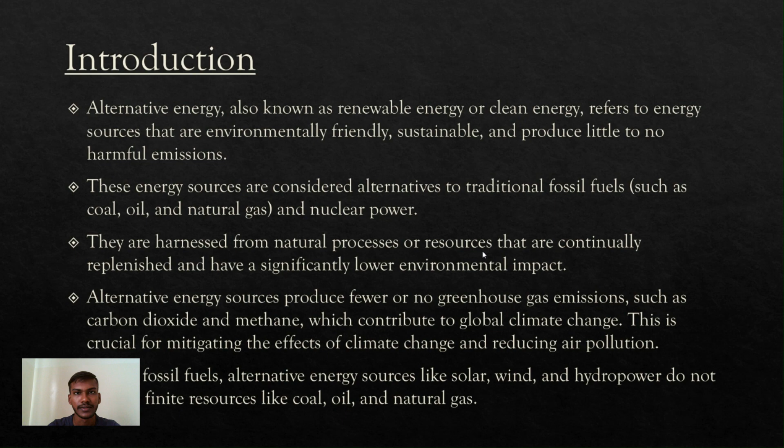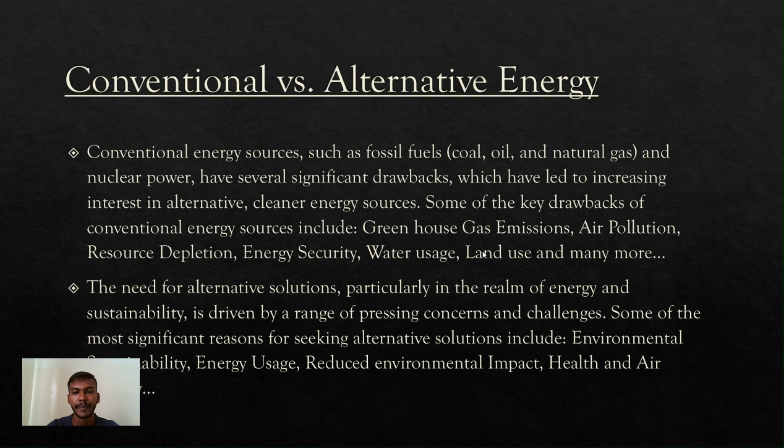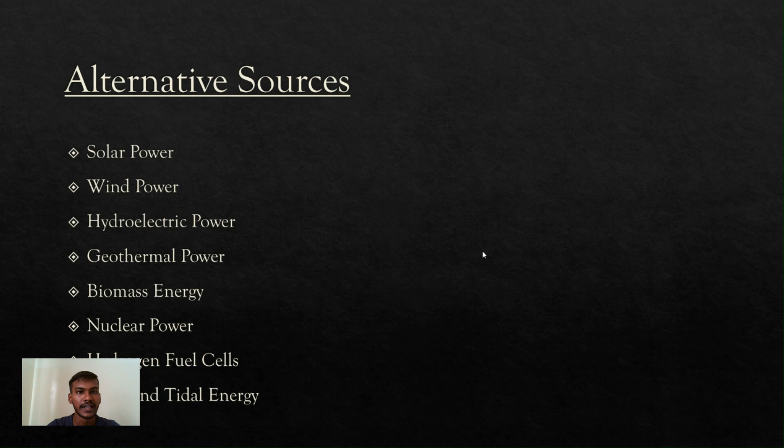We will be discussing the following alternative sources: solar power, wind power, hydroelectric power, geothermal power, biomass energy, nuclear power, hydrogen fuel cells, and wave and tidal energy. Now let's see them one by one.

Solar energy or power. Solar energy is a renewable and sustainable energy source that is derived from the radiant light and heat emitted by the sun. This energy can be harnessed and converted into electricity or used for various heating and cooling applications.

Solar energy can be harnessed through two main technologies. The first is solar photovoltaic systems. These systems use solar panels to convert sunlight directly into electricity. Solar panels are made of semiconductor materials, typically silicon, which generate an electric current when exposed to sunlight. This electricity can be used on site or fed into the grid.

Solar thermal systems capture the sun's heat to produce hot water or generate steam that can drive turbines for electricity generation. These systems are often used for water heating and industrial applications.

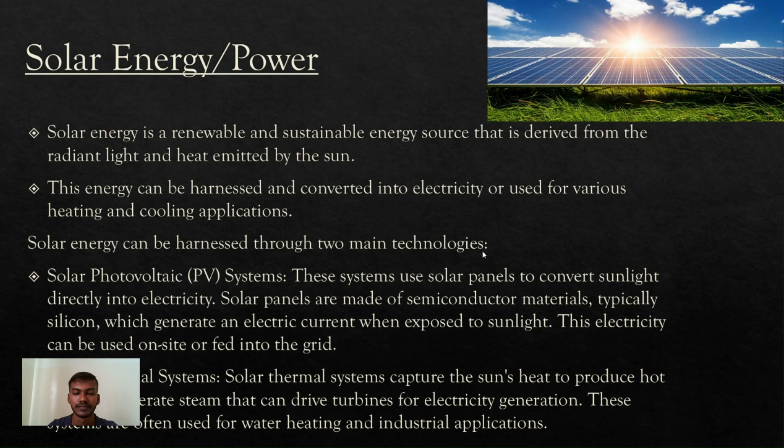The second source is wind energy or wind power. Wind energy is a renewable and sustainable energy source that is harnessed from the kinetic energy of moving air, primarily through the use of wind turbines. Wind turbines are designed to capture this energy and convert it into electricity. Wind energy has become a prominent part of global efforts to transition to cleaner and more sustainable energy sources.

Wind energy can be harnessed through two main types of wind turbines: horizontal axis wind turbines and vertical axis wind turbines. Horizontal axis wind turbines are the most common type and consist of a tower with a horizontal rotor shaft and blades.

Vertical axis wind turbines have a shaft and blades that spin around it. They are less common but have some advantages such as lower wind height requirements and easier maintenance.

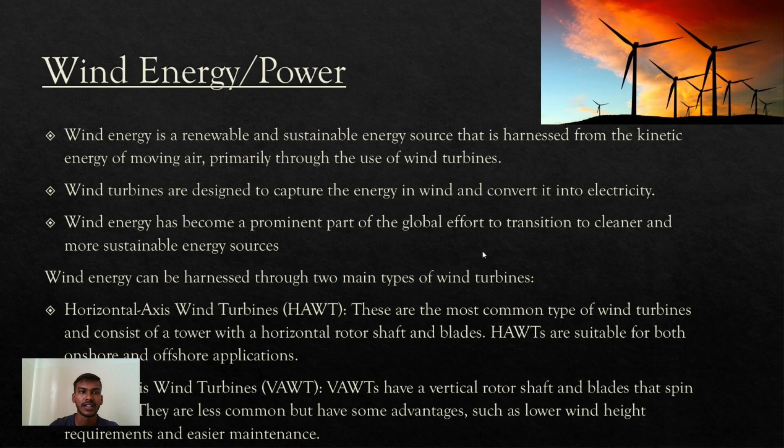The third source is hydroelectric power. Hydroelectric power is a renewable and sustainable energy source that is generated by harnessing the kinetic energy of flowing or falling water. This energy can be converted into electricity through the use of hydroelectric power plants. Hydroelectric energy is one of the oldest and most widely used forms of renewable energy.

There are several types of hydroelectric power plants, including conventional hydropower and run of the river hydropower. Conventional hydropower power plants use dams to create reservoirs of water, which is then released through turbines to generate electricity. This is the most common form of hydroelectric power generation.

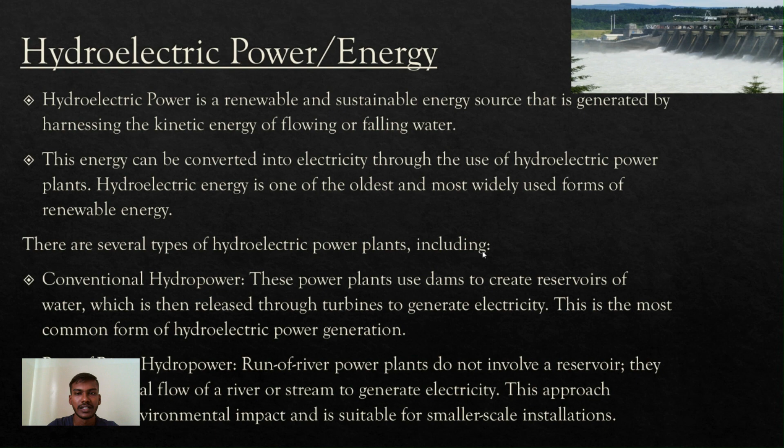Run of river hydropower plants do not involve a reservoir. They use the natural flow of the river. This approach minimizes environmental impact and is suitable for smaller scale installations. The next one we are going to see is geothermal power.

Geothermal power is a renewable and sustainable energy source that harnesses heat from the Earth's interior to generate electricity or provide direct heating and cooling. Geothermal energy is derived from the natural heat from the Earth's core, which is the result of the radioactive decay of minerals and the primordial heat left over from the planet's formation.

There are several types of geothermal power plants, including dry steam plants. These plants use high temperature steam directly from underground reservoirs to turn turbines and generate electricity.

Flash steam plants utilize high temperature, high pressure water from underground reservoirs. Binary cycle power plants use lower temperature geothermal fluids.

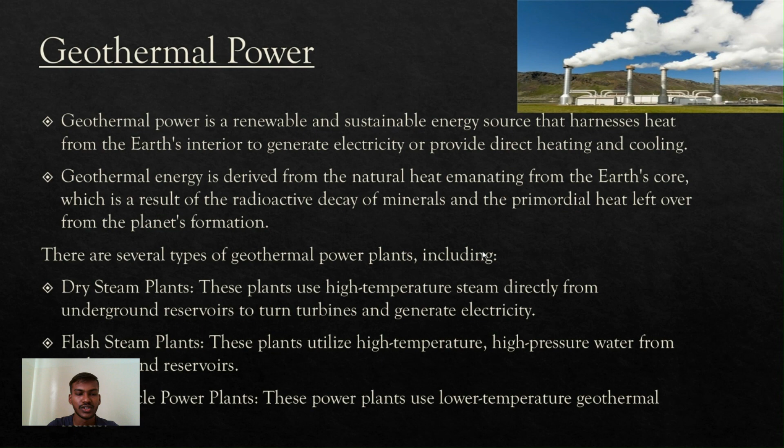The next one we are going to see is biomass energy. Biomass energy is a renewable and sustainable energy source that is derived from organic materials such as plant and animal matter, agricultural and forestry residues, and organic waste. This energy can be used to produce electricity, heat, and biofuels.

There are several methods for converting biomass into energy, including direct combustion. Biomass is burned to produce heat or electricity. This is the simplest and most widely used method.

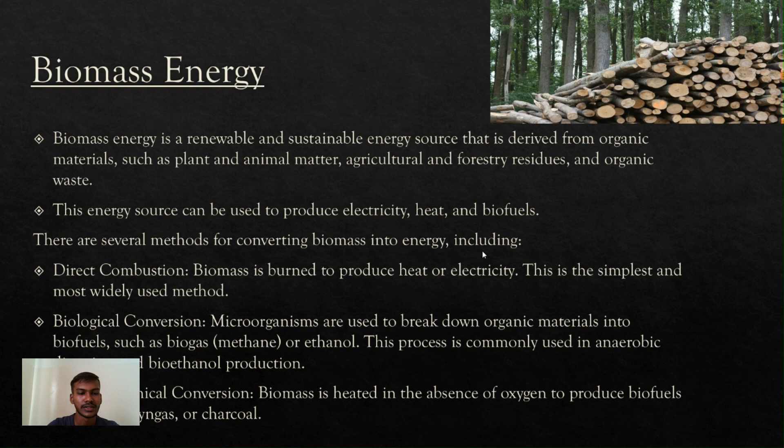Biological conversion: microorganisms are used to break down organic material into biofuels such as biogas or ethanol. This process is commonly used in anaerobic digestion and bioethanol production. Thermochemical conversion produces biofuels like bio-oil, syngas, or charcoal.

The next one is nuclear power. Nuclear power is a source of energy that is generated through the process of nuclear fission, where the nucleus of an atom is split into two or more smaller nuclei, releasing a significant amount of energy. This energy can be harnessed to produce electricity in nuclear power plants.

There are two primary types of nuclear reactors used for power generation: pressurized water reactors. In pressurized water reactors, water is used both as a coolant and a moderator. The water is kept under high pressure to prevent boiling.

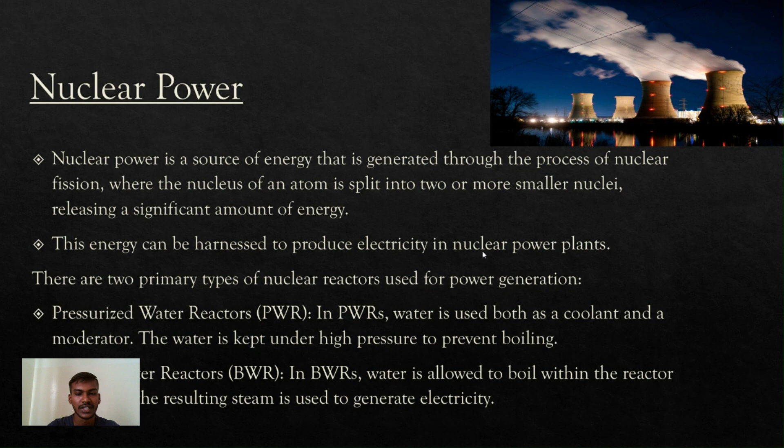Boiling water reactors: in boiling water reactors, water is allowed to boil within the reactor vessel, and the resulting steam is used to generate electricity. Now let's see the benefits of alternative energy.

Alternative energy sources help reduce greenhouse gas emissions and combat climate change. They promote energy independence by diversifying the energy mix. Alternative energy sources can create jobs and stimulate economic growth in the renewable energy sector.

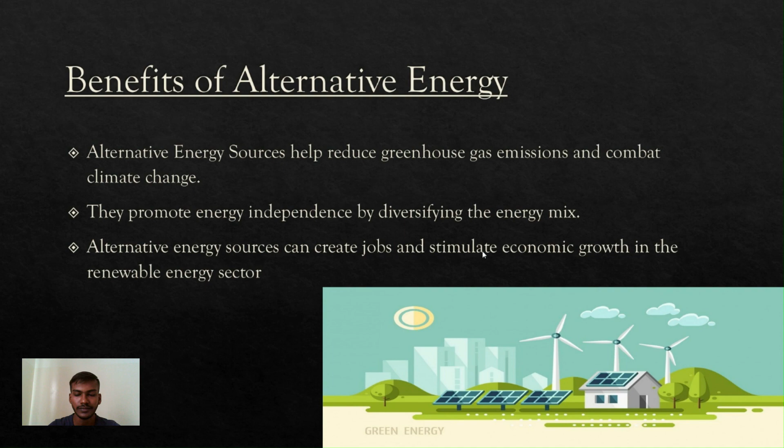In conclusion, alternative energy sources offer compelling and sustainable solutions to some of the most pressing challenges of our time. These energy sources, often referred to as renewable or clean energy, provide numerous advantages that contribute to a more environmentally responsible, economically viable, and socially beneficial energy landscape.

The advantages of alternative energy sources underline their crucial role in creating a more sustainable, environmentally responsible, and economically viable energy future. However, it's important to recognize that challenges remain, including the need for continued technological innovation, infrastructure development, and responsible resource management, as society continues to embrace these clean alternatives.

There is a growing opportunity to address critical energy and environmental issues in the 21st century.